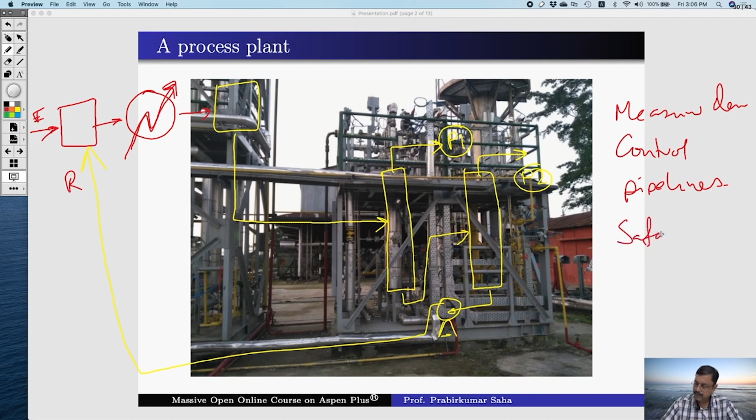Now, in addition to this main equipment, there are plenty of other ancillary equipments and devices such as measuring devices, control system units. There are various pipelines. There are safety devices and alarms. And there are mechanical structures as well, which are necessary to build these process units. Now, for the time being, these are not important for the focus of our discussion. We pick and choose only these 6 units for our discussion because these are the principal units.

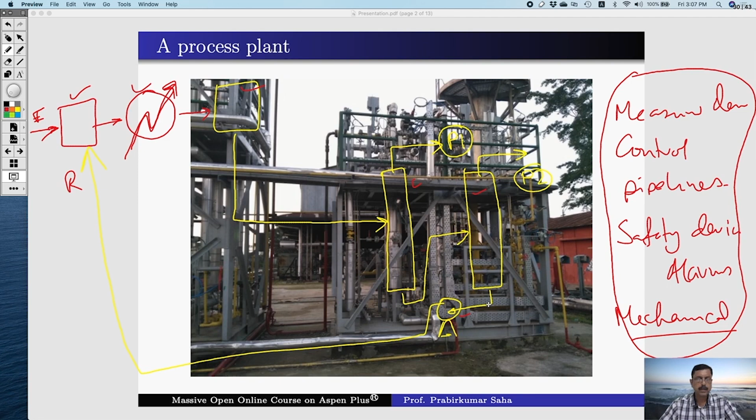Now, we make a schematic of the process plant where we have kept the principal units, that is the mixer, the heater, the reactor, distillation unit 1, distillation unit 2, and the pump. These 6 units we have kept. All other things we are not interested about.

Now, what happens in this unit of the process plant? We give feed. Feed means the material feed, which is being heated up before it goes to the reactor and the reaction happens. The reactor content is then distilled. That is the material feed. And also we have energy feed, because we have to operate the heater, the condensers and the reboilers of the distillation column, and the pump. We need electrical energy. So basically, in this process plant, we have to give two types of feed. One is material feed, another is energy feed.

And the products we will get out of it, this is P1 and this is P2. Two types of products. So ideally, we have to make sure that these products are up to the desired standard of their quality and quantity. In other words, we have to make sure that the flow rate of the product and its quality is maintained.

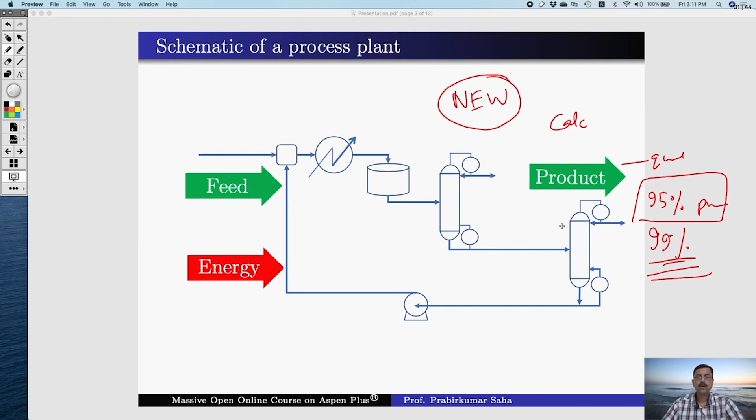We do not know what to change, but we have to do some what-if analysis. That means, if we change the heater temperature, if we change the condenser pressure, if we change the reflux ratio, how far will the product quality change? So these are the various what-if analyses that we can do in order to arrive at the market demand quality.

Now, these things cannot be done in the real life plant. The plant manager will not allow one to go and meddle with the system. So one needs to do on pen and paper some calculation. How to do that calculation?

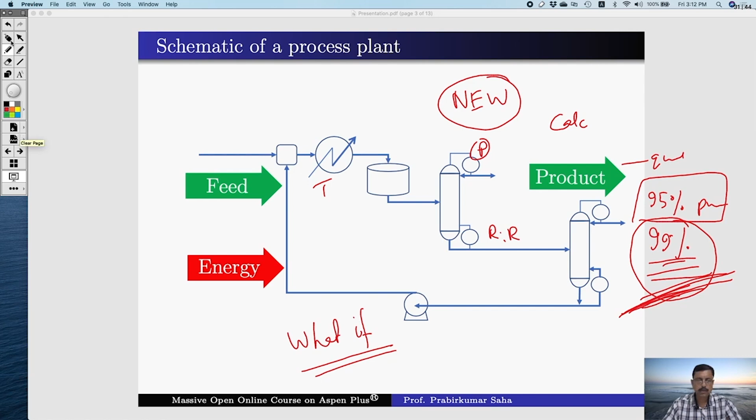We all know we have to replace these processes, or we have to replace this equipment with their mathematical counterpart. Here you see we have replaced the mixer, heater, CSTR, all of them have been replaced by a set of differential and algebraic equations.

And these equations have been taken from textbook. They are well-known equations. They have been developed from mass balance, energy balance, rate equations for CSTR, the vapor-liquid equilibrium in case of distillation column, etc. So these are all standard equations whose structures are same. No matter which distillation column you use, they remain same.

What changes? The number of trays change in a distillation column. The components change. In one distillation column you may work with methanol, another you can work with ethanol, and so on. So based on the component that you use, your property database will change. The flow rate, temperature, pressure, those things will change, but the structure of equation remain same.

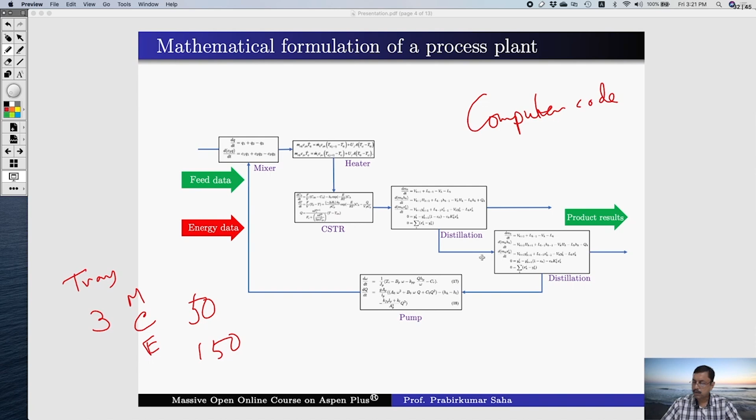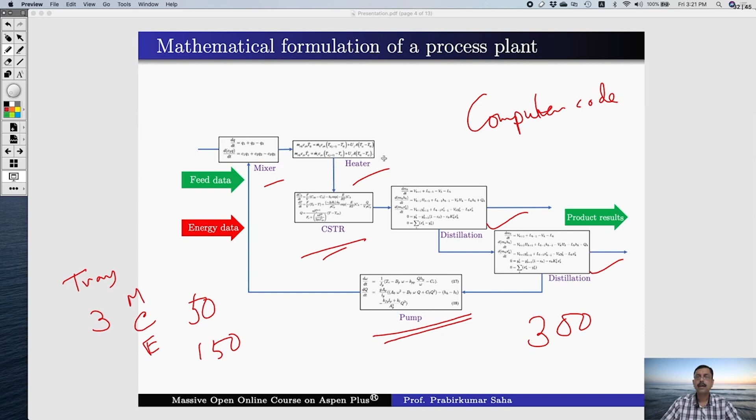Suppose a distillation column has 50 trays, then we have to solve 150 parallel ordinary differential equations. Now talk about 2 distillation columns, the number rises to 300. And add on the equations of pump, CSTR, heater, it will be a gigantic task. Now the question is, is there any other option for easy handling of these equations?

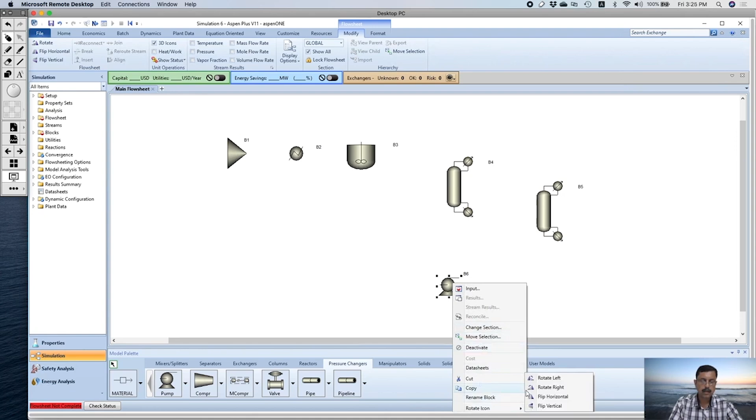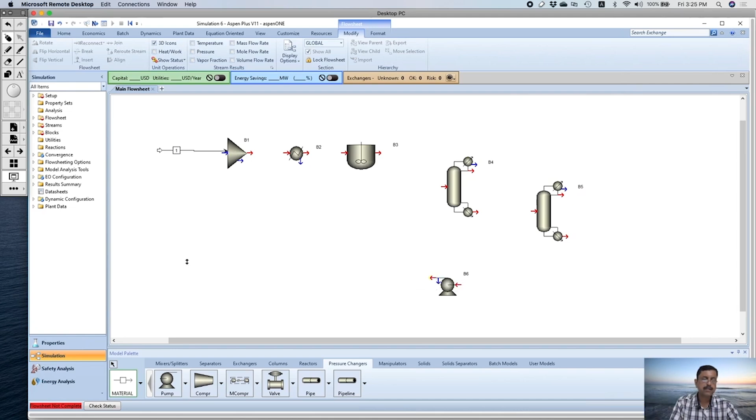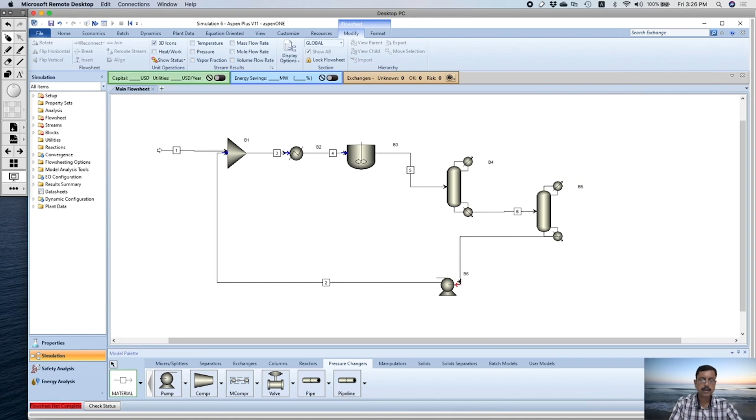So this is connected, the pump output and the recycle loop are mixed. The mixer output is connected to the heater. The heater output is connected to the reactor. Reactor output is connected to the column. First column output is connected to the second column. The second column output is again connected to the pump. And here we have product 1 and product 2.

Now here you can see the same structure, the model, the unit we have connected. Each and every module, this is only the front end. The actual calculation happens in the background. So when we are dragging the column, all the equations associated with the column are taken into the simulation in the background. We don't see those equations, but they are there behind the scenes. In the front end, we have this small icon that represents the distillation column.

Now, as you understand, in the distillation column you have to set some values. Just look at what we need to give: the number of stages, the feed stage, the reflux ratio, and so on. So these are the data we have to feed in, but we don't bother about the background equations because they are all set by Aspen Plus. We don't have to pick and choose those equations.

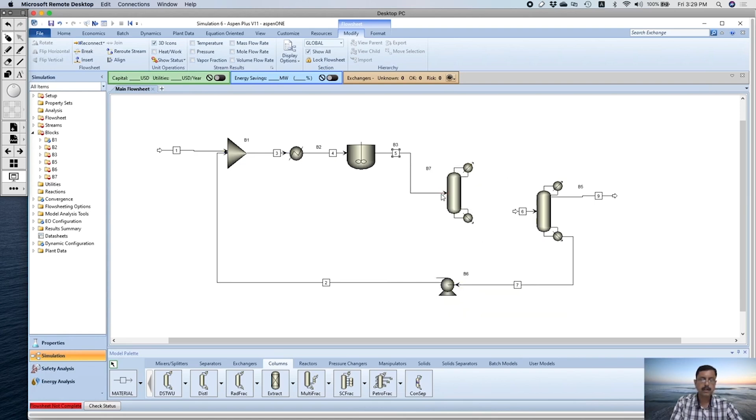Instead, we can use some other column. We can use a RadFrac column, which is also a distillation column. We can put it in here, and then we can connect or reconnect the stream at the destination over here. And then again we can reconnect this stream with the source, which is here.

And finally this is our product. So when we delete something, all the equations associated with that particular module also vanish. And when we add in something, all the equations associated with it come in. So that is the beauty of the Aspen Plus front end. This is the flow sheet model.

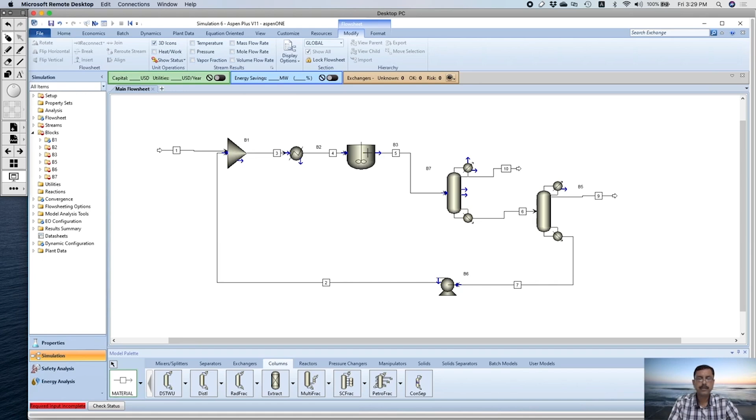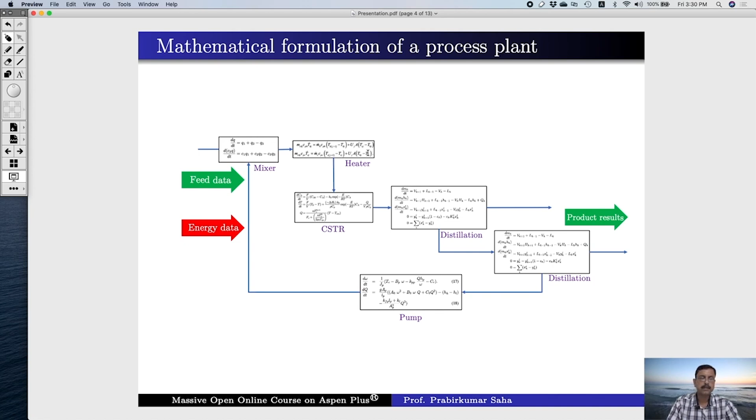We'll learn it later in detail. So this is how the mathematical formulation can be done. Now we talk about the approach to Aspen simulation.

Now, whatever we just discussed is actually the sequential modular approach. That means we take some modules and place them in sequence, and those unit operation blocks are called modules. They are connected and solved in a certain sequence for steady state operation. This is called Aspen Plus.

But not all the unit operations available in chemical or process engineering are standard. Like distillation column is standard, reactor is standard, heat exchanger is standard, but there are some equipment which may be non-standard. So you will not find a standardized model in the model palette. For them, you have to write your own customized equation to work with.

So the next one is the equation-oriented approach, where you have to work with a customized model. Those are developed through equations which are solved simultaneously for dynamic simulation. Here it was steady state, here it is dynamic simulation, and this is called Aspen Custom Modeler.

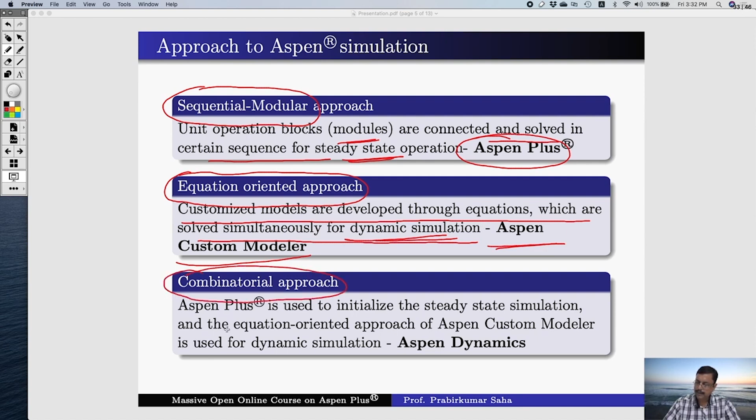And lastly, there is a combinatorial approach where Aspen Plus is used to initialize the steady state simulation, and the equation-oriented approach of Aspen Custom Modeler is used for dynamic simulation, which is Aspen Dynamics.

Now in this particular course we have only Aspen Plus. We will discuss Aspen Plus. For Aspen Custom Modeler and Aspen Dynamics, someone may float a different course altogether. So we will limit ourselves to Aspen Plus.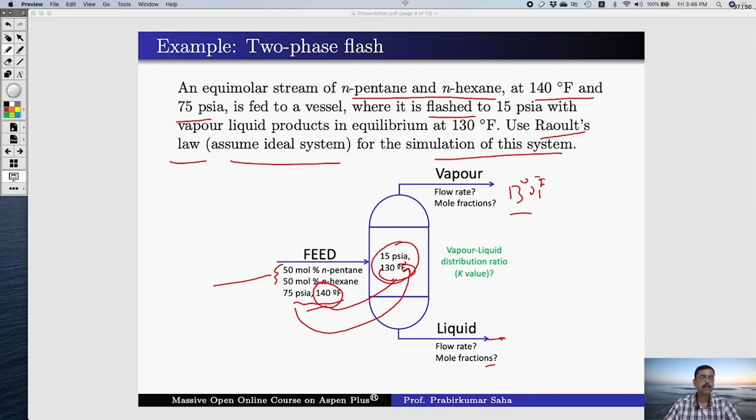So this is the solution procedure. We have to find flow rates of vapor and liquid. Let us represent it with V and L. The K values of N-pentane and N-hexane. We have to find the mole fractions of N-pentane and N-hexane in vapor phase and liquid phase. So Yp and Xp are for pentane. P represents pentane. So Yp is for N-pentane, Xp is also for N-pentane, in vapor and liquid phases respectively.

And as it is a binary system, 1 minus Yp is N-hexane and 1 minus Xp is N-hexane in vapor and liquid phases. And lastly, we have to calculate the heat duty of the flash operation.

Now these are the relevant equations for calculation. The first thing, we have to find the vapor pressure, and we know the Antoine equation is used for finding the vapor pressure, and vapor pressure depends upon the temperature. And here we have two equations rather, for N-pentane and N-hexane. These are the vapor pressures of pentane and hexane at this temperature.

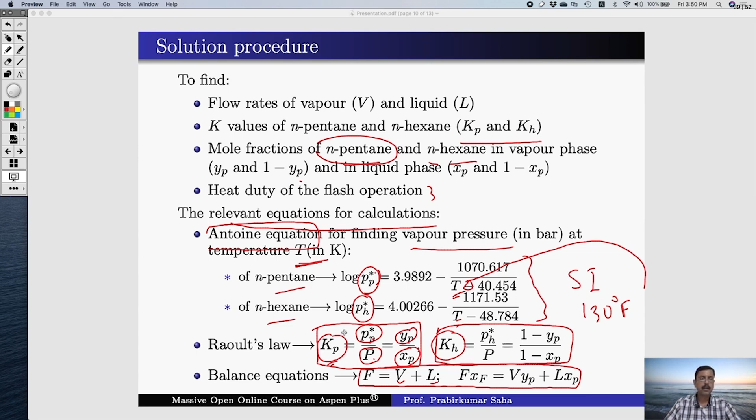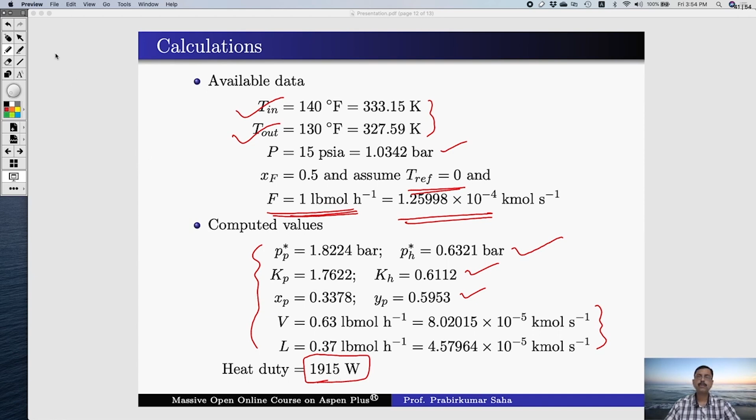Now let us do the same calculation in Aspen Plus. First, we have to fix the components. Now we have two components over here. One is N-pentane, another is N-hexane. So we do not know where to find the N-pentane and N-hexane. So we take the help of this button. Just increase a bit.

And here we write pentane and find. Here Aspen Plus will dig out all the components that have remote connection with the word pentane. So just see, we have 1,1,2-trimethylcyclopentane, 1,1,3-trimethylcyclopentane, and so on. Here we have 1-chloropentane.

So from this list, we have to dig out the one which we are looking for. This is the one that we were looking for. So just press add selected compounds. Here this is added. N-PEN-01, it has given a component ID which anyway we can change anytime, and this is the component name. C5H12 is the alias.

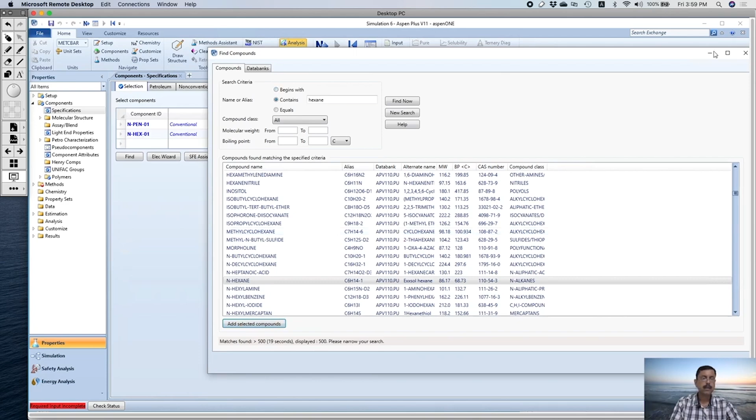Similarly, we can go for a new search, say hexane. Here again we have to dig out the component. Yes, this is the one that we are looking for. Add. Now we can close it. So these are the two components that we have got, n-pentane and n-hexane. We can change it anytime.

Suppose we are not happy with this component ID, so we write pentane, and here we can write hexane. Instead of pentane and hexane, you can give any name. It doesn't matter. It is just an ID. For any Aspen Plus, for any simulation, it is always best to go to the next button. Next button, it says go to the next input sheet needing input. So many times we do not know where to go, but if you press next, the simulation will take you to the point where the next input is required.

Now it is asking for the base method, that is the property method. Now we know that we have to work with Raoult's law, which is an ideal system. So our base method is ideal. So the ideal property method uses both Raoult's law and Henry's law.

Now you can see here there is an icon which is half red and half white. This means that the input is incomplete. The moment input is complete, you will find a blue tick like this. Okay, so the moment I choose ideal, you see a blue tick. That means the input is complete here. Unless the input is complete, you cannot find this blue tick here. Now our property input is complete.

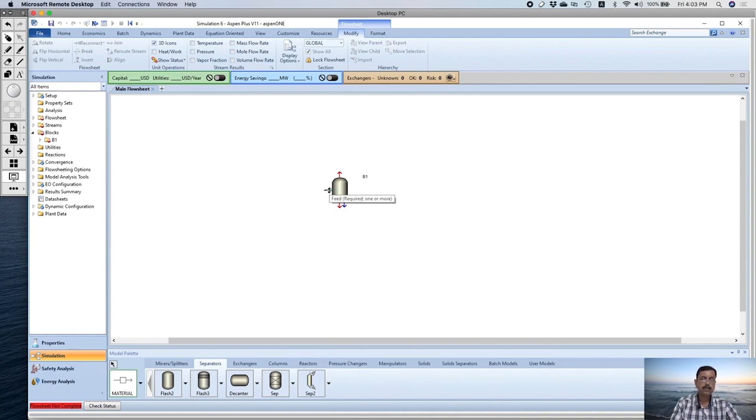Okay. Now we have to add the material stream. The red always means it is asking for input. So it is asking for 1 input and 2 outputs. So this is the feed input. This is the vapor output, and this is the liquid output.

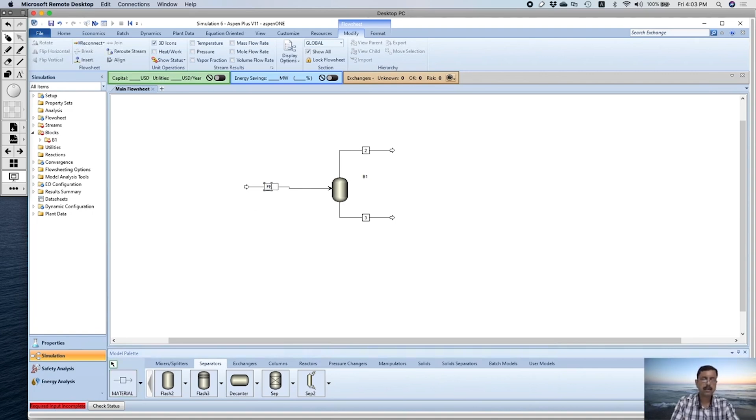We can rename it. So let us rename it as feed. We can rename it as vapor, and we can rename it as liquid. Again, it is just a simple name. It doesn't have any other significance. Instead of vapor, you can write V also. Instead of liquid, you can write L also.

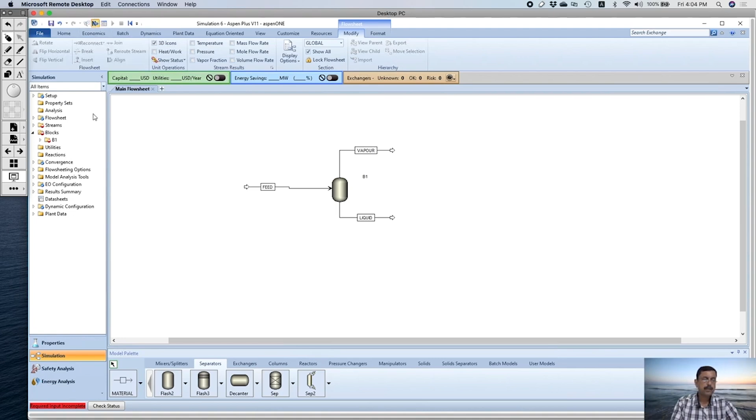Now, again you press next. It has gone to streams. Streams, feed input. Now it is asking for input. So what is the feed condition? As we know, the feed condition is 50 mole percent n-pentane, 50 mole percent n-hexane, 75 psia pressure and 140 degree Fahrenheit temperature.

So here the inputs are all in SI units, but our data has been given in English, British units. So we change it from metric to English. See, it is asking for English units. We can mix and match. We can give it in C, we can give it in Kelvin also, but whatever we give, the Aspen Plus software has its own way of converting the unit as it demands.

So we give the data 140 degree Fahrenheit and 75 psi pressure, and then the total mole flow rate we have used 1 pound mole per hour. So it is 1 pound mole per hour. Now it is still half red and half white because we have not given the composition. So composition we can give in mole flow, mole fraction, mass fraction, standard volume fraction, etc. We will give it in mole fraction.

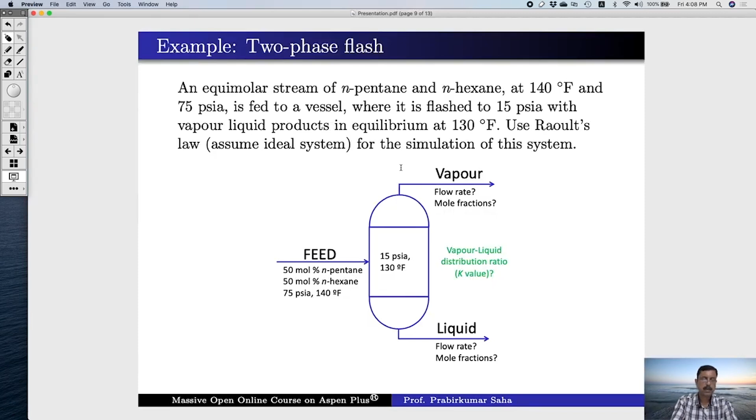So temperature is how much? It is 130 degree Fahrenheit, and pressure is 15 psi. The moment I give it, it is blue ticked. That means all of them now are blue ticked. Okay, so the required input is complete. Now we press next. There is no input required. It is asking run the simulation now. All the required input is complete. You have to say yes.

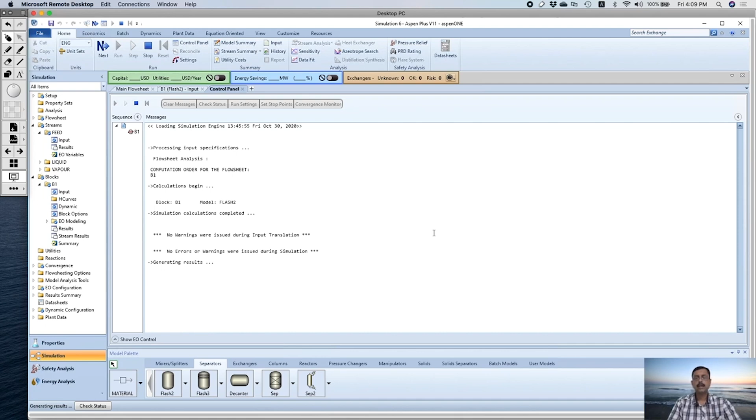Okay, run it. So it is running the simulation in the background. Basically, it is working with all the set of equations that we have brought in from the model palette to the flow sheet. Now we go back to the simulation. You see what happens. These are the loading simulation engine, processing input specification, flow sheet analysis, computation order for the flow sheet. Calculation begins for block 1, flash 2, simulation calculation completed, no warning, no error, generating result. So we have got some results.

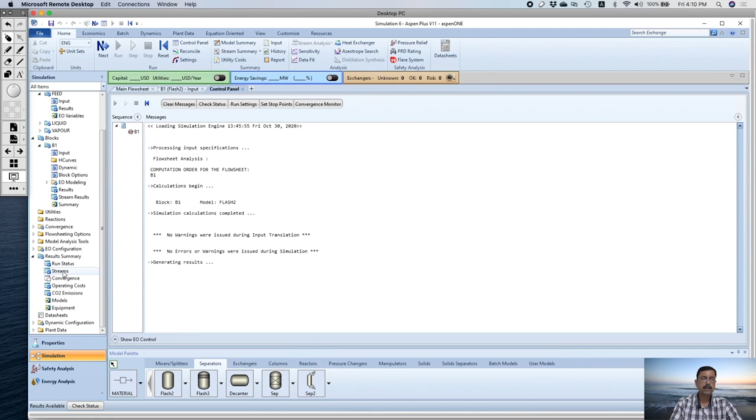So go to the result summary. What are the streams? We have 3 streams, and all these streams are given here: feed, liquid, vapor. What are their temperature? Feed is in liquid phase. The feed at 140 degree Fahrenheit, it has to be liquid. Vapor phase, vapor, liquid phase, liquid. So both liquid and vapor, we have 130 degree Fahrenheit, but feed is 140 degree, pressure 75, 15, 15.

Now, mole flow. So how many moles of vapor and liquid we see? 0.63653 pound moles per hour, 0.36347 pound moles per hour. Now let us check with our calculation. Just go back. Here you see, we had calculated V 0.63, here is 0.63653, L 0.37, here 0.37. There will be slight variation in calculation because Aspen may not use the Antoine equation. It has its own data bank which it is using.

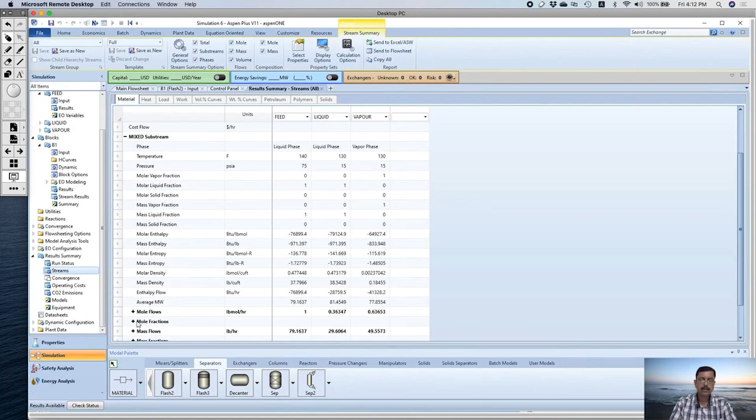And what about the mole fraction of pentane? 0.3366 in liquid phase, 0.5933 in vapor phase. So it is almost same. The mole fraction, pentane, liquid phase 0.33, vapor phase 0.59. And lastly, the heat duty. Heat duty we have calculated to be 1915 watt.

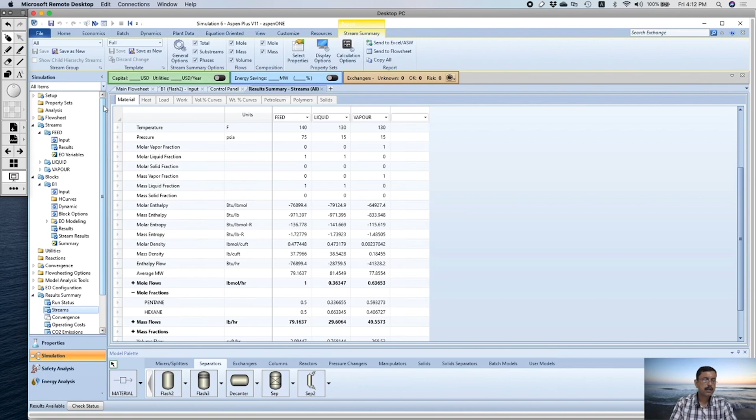So let us go back to the block B1. Here some results are given. Heat duty is 6811 British thermal unit per hour. Now if you want to see it in watt, just go there, it is 1996. Our case it was 1915. So 1.9 kilowatt, so it is also 1.9 kilowatt. Now this much of error is evident because we use Antoine's equation, whereas Aspen Plus has its own set of equations and database which is proprietary in nature. They are very much realistic and they are tested. So that is how we solve it in Aspen Plus, and the results are also matching.

So instead of going through this tedious calculation, we can simply put it in Aspen and do the calculation in a very simple manner. Now suppose if you want to change the feed input from 140 degree to 150 degree Fahrenheit, then we have to run the simulation once again, and the heat duty will definitely change. Let us see what is the heat duty. Earlier it was 1996, now it is 1848. So the heat duty has reduced.

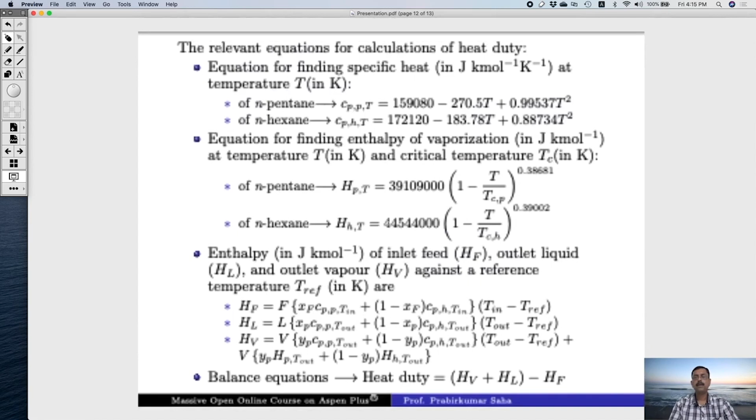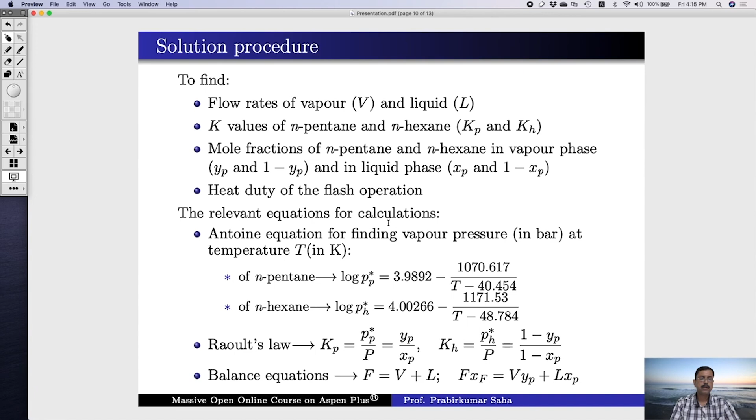So this calculation is very fast. A design engineer can perform these calculations very fast and very effectively, but the same calculation if you have to do in this fashion, then it will take long time and sometimes very tedious. So that is the advantage of Aspen Plus. Now with this small introduction, in the next few lectures we will go into the detail of how the Aspen Plus software can be used most effectively.